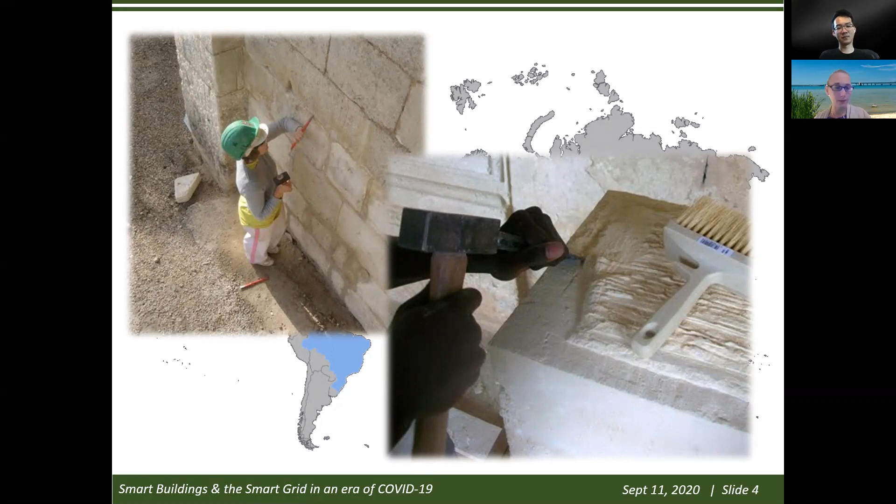But before then, during my undergrad and master's, as well as between them, I spent some time abroad. I worked in France for a little while doing historical restoration - these are pictures of repointing old buildings in Saint-Emilion. We actually got to hand carve stones to replace ones that had fallen out of infrastructure. It was really interesting to learn. This was one of my favorites that we carved, kind of unique. That was really fun.

I also worked for almost 10 years with Engineers Without Borders at the University of Maryland chapter. We did several different projects that I worked on in Brazil, including a wastewater treatment system and constructed wetlands. I really enjoyed that.

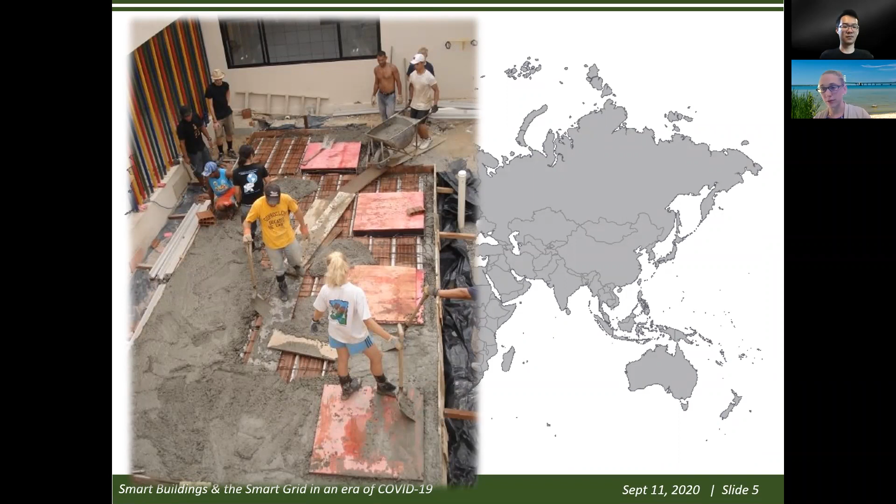Also did some solar decathlon work. These are some of the first two participations University of Maryland had in the solar decathlon competition, close to its beginning. That was enjoyable and introduced me to a lot of building concepts.

I worked for a little while in DC at Simpson Gumpertz & Heger doing what I'd call forensic engineering and building envelope consulting. They're most known for designing Epcot's ball, the big dome, if you've ever been there.

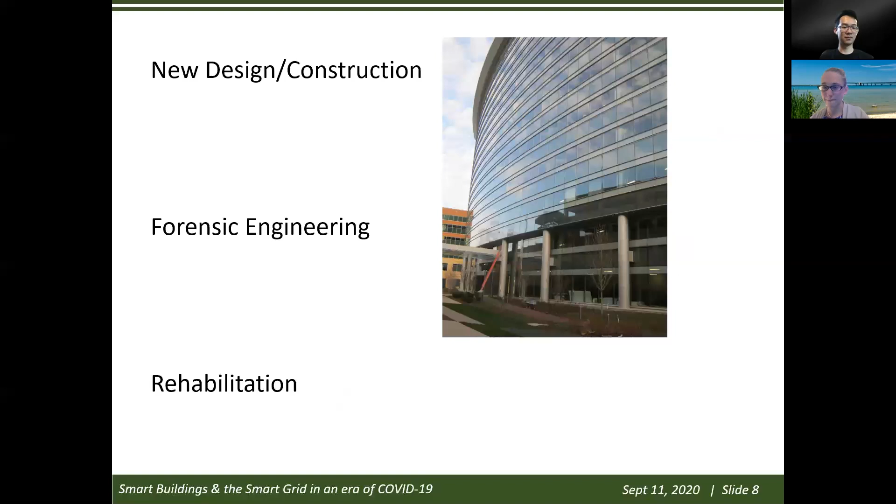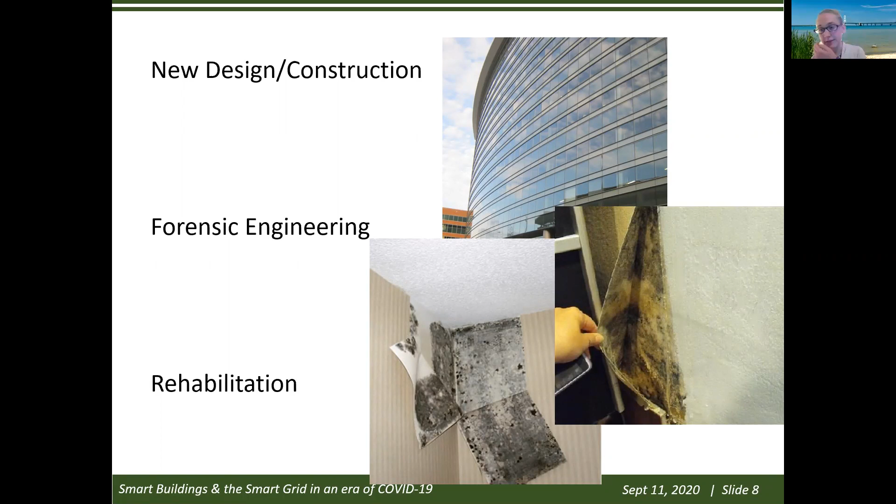We did new construction work, like going to buildings and telling contractors what they were doing wrong and how to fix it, and investigating challenges like mold-related issues behind wallpaper and impermeable surfaces. That was really interesting. Then there was rehabilitation work, which often combined structural engineering concepts with building systems concepts. I enjoyed that a lot.

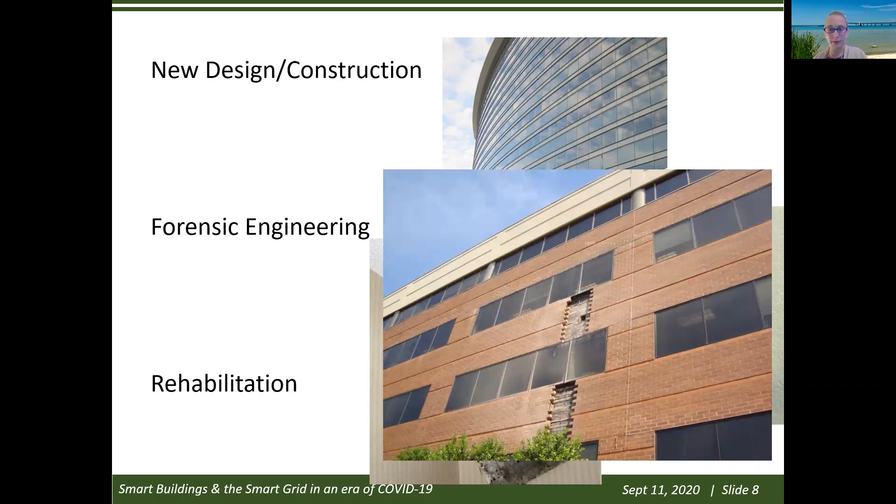For some personal reasons, I had to leave the DC area, so I ended up working and going to UT Austin in the Building Energy and Environments group, doing my PhD there for a few years. I also spent some time at NREL, the National Renewable Energy Lab in Colorado, in their residential building group, getting my foot in the door with research.

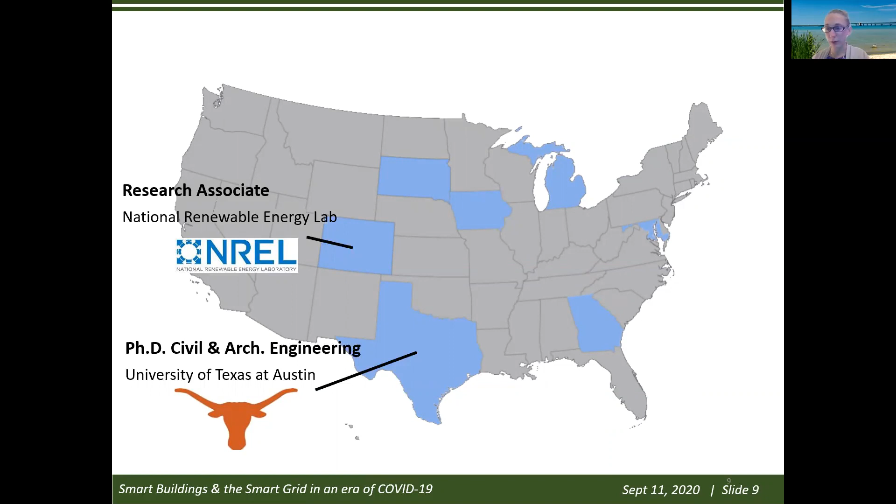Then I ended up at Iowa State University in the construction engineering program, teaching construction engineering courses and doing building-related research. Now I'm finishing my first year at Michigan State, and I'm greatly enjoying it—a bit of a different atmosphere, but that's been my journey to where I am right now.

In terms of research, I've always enjoyed this idea of sustainability, which stems a lot from these background experiences. To summarize what you'll hear about in the research projects here: it's mostly related to buildings, but not all buildings—there's a lot of civil infrastructure that requires the same skills and knowledge as building systems, just a different application. That's why I focus more generally on infrastructure systems.

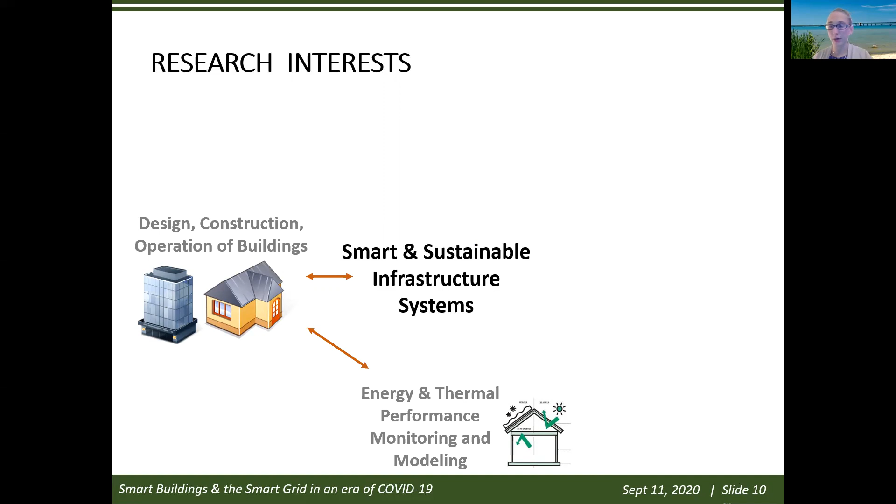So, design, construction, and operation of buildings, trying to make them more sustainable. To do that we have to understand the components of a building: energy and thermal performance—how it consumes energy, how it interacts with the environment—and how it interacts with occupants. Occupants are really important, because if they aren't comfortable, we've lost the point of having a building in the first place.

Then there's occupant behavior—what do occupants do, how do they interact with the environment, and how do we model, simulate, and understand that for a typical building? And then there's the part we can't control, the climate. This has a huge impact on HVAC systems, heating and cooling, and a big impact on comfort. It's very important for us to model and understand the interaction of buildings with climate.

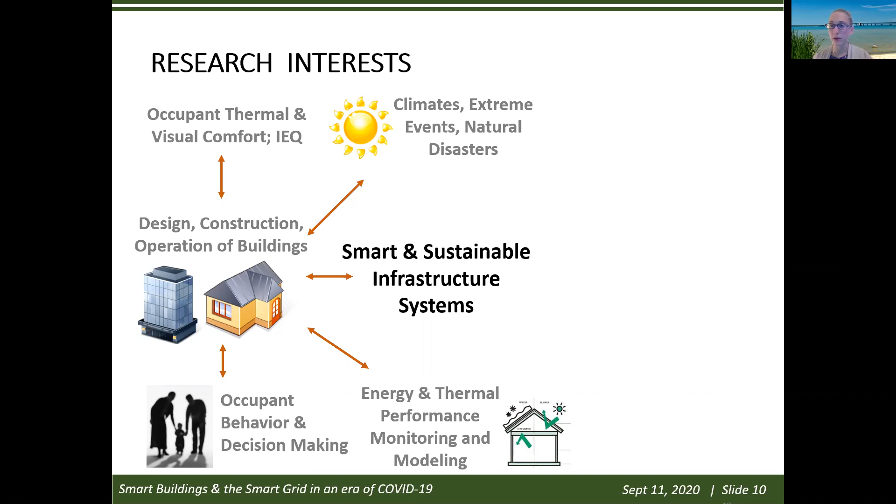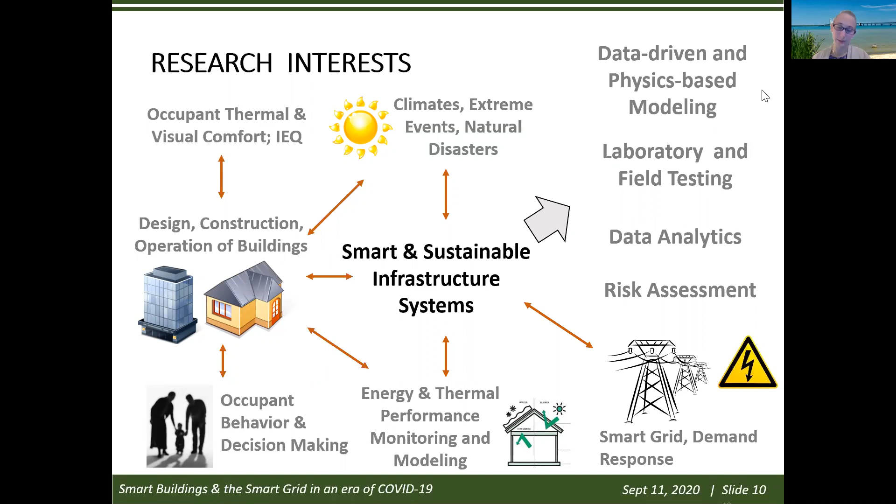All of these factors interrelate and connect to what's a more recent and important topic, according to most sponsors at least—the smart grid. As the electric grid becomes more renewable, it's important for buildings to interact with it. How do we do research in these areas? A lot of it is modeling, often combined with laboratory or field testing to validate those models, plus data analytics for data-driven modeling and some risk assessment. All of that is interrelated.

If we're going to summarize the main things we're working on, it's a combination of building science—understanding building systems and their interactions—with the idea that we have a more connected environment than we used to. Combined together, we're trying to make buildings more efficient, flexible, interactive, healthy, productive—just better in general, smarter and more beneficial to the end user. That's the overall idea.

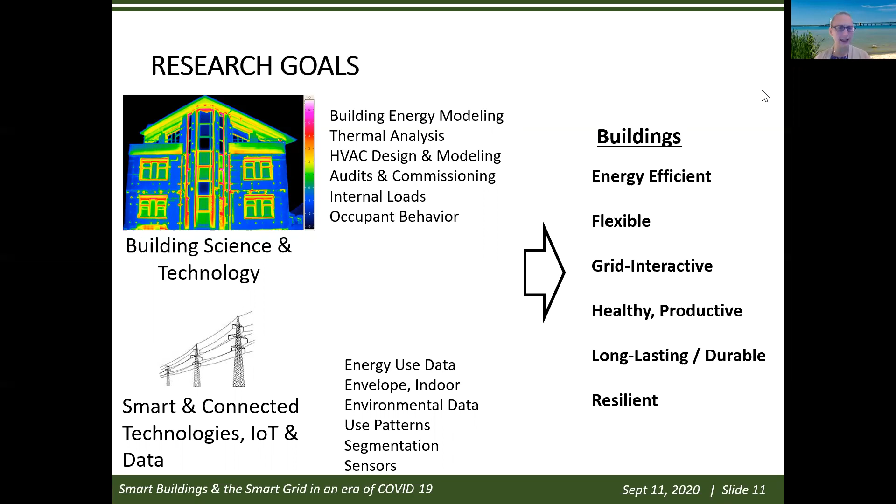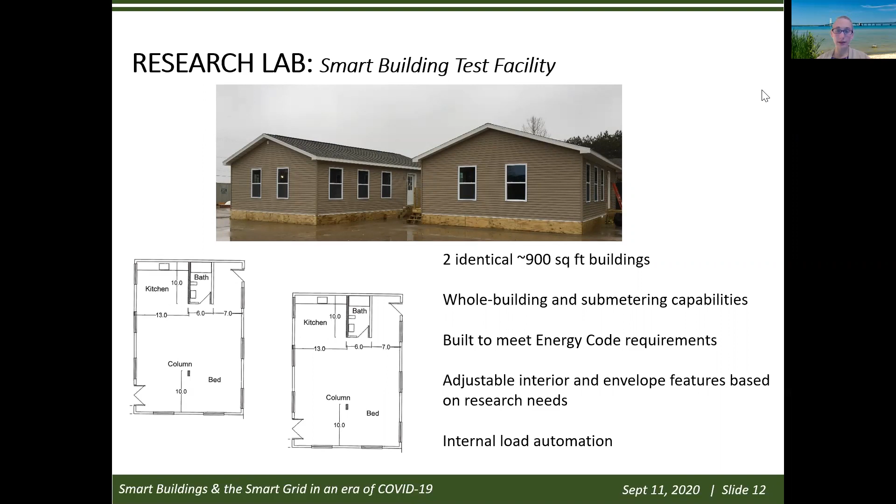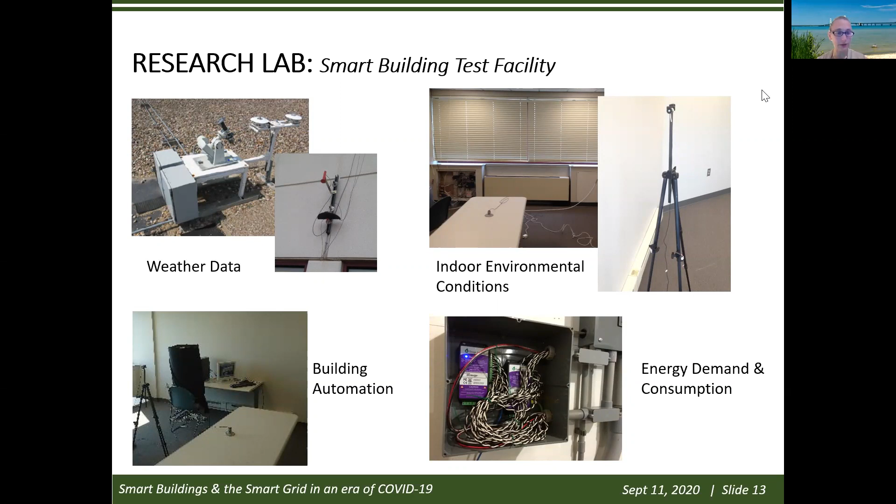So that's kind of the idea here. We automate the different systems, collect the weather data, indoor environmental conditions, energy use in these buildings to assess performance. We have a number of projects, and I'll talk about one of them here that is ongoing in those spaces. In this field, there's a lot of different applications.

But before I talk about the specific topics, I think it's important to provide some context here. I may be speaking to the choir in understanding what these challenges are, but I do think it's important to discuss, as this is ever evolving, and just like the title of this presentation suggests, things happen that are completely unexpected that impact the building field.

COVID-19 is one of those, for example, from a ventilation perspective and an energy consumption perspective. But then we also have things like climate, and climate is not something we can necessarily predict on a frequent basis, but we can look at long-term trends and try to understand what we can do to adjust our buildings.

To make them more resilient and more sustainable. So that's what I'll talk about here for a few minutes, and focus on energy related challenges, because that really is the main component of this research.

So we think about electricity consumption as we grow in population, in number of buildings, and looking at the historic trends and into the future, it's projected that we will continue to increase our electricity consumption. Similarly with energy consumption, we'll see these increasing trends.

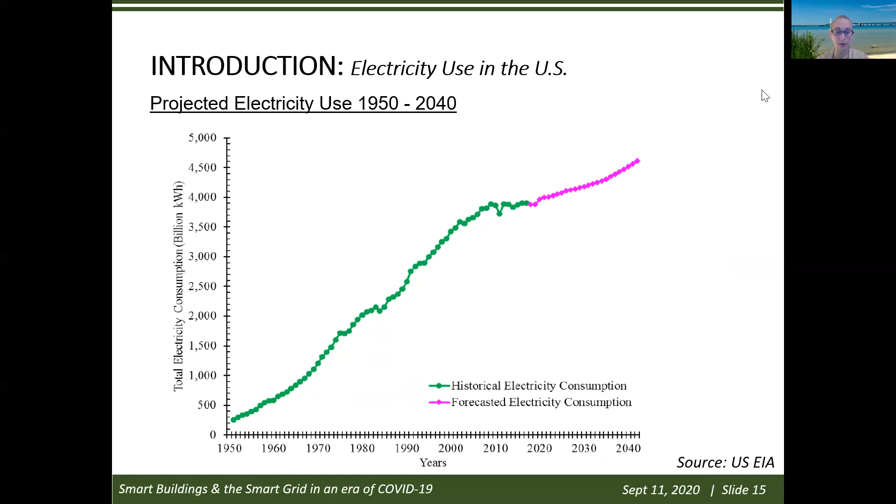And if we consider what is the best opportunity or target to be able to identify ways to reduce, or at least somewhat reduce, that energy or electricity consumption, buildings really are a significant portion—about 40% of our energy and about 74 or 75% of our electricity.

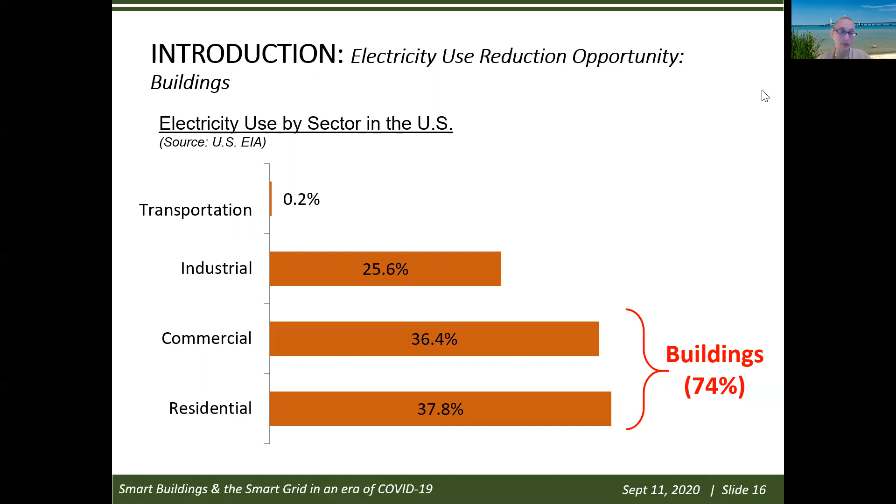And if there's not any other motivation to try to reduce this consumption, we have plenty of recent events to remind us of some of the climate change related challenges. The wildfires currently going on the West Coast, and a record number of hurricanes that have occurred recently this year before September.

That have made landfall. I came from Iowa, so recently the Iowa area had this major land hurricane with major straight line winds that devastated a lot of the infrastructure there. There's been record heat in Arizona this year and much of the Southwest, setting records that haven't previously been beaten in a while.

And we have some projects—we have a project right now working in Alaska where permafrost melt is a major issue. So you've got structural related challenges and energy related challenges in that area because of the changing climate.

So if there's no better reminder to try to think about addressing some of these energy related challenges, that's certainly some of them. Beyond electricity consumption, so kilowatt hours in general, we're also looking at demand, because buildings are a substantial consumer on the electric grid. It's important for us to consider their role in trying to make the electric grid more sustainable and more reliable.

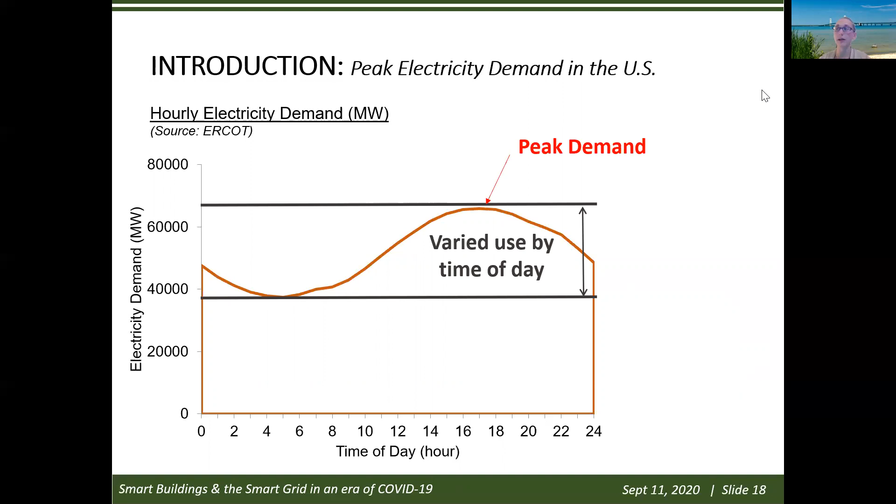So this is a plot from Texas, but it's general, kind of looks like this for all summer periods on the electric grid in the US, where we see this variation. And when it gets very hot, we get significant peak demands, and in extreme climates, for example in Texas, that significantly increases electricity prices. It can stress distribution or transmission on the grid, and also require peaker power plants, which are less efficient than ideally we would like to use.

So if we're trying to address this, buildings, at least based on some studies that have been done, are a substantial portion of this peak demand. So if we go back here, this late afternoon around 5 p.m., we've got a combination of commercial buildings being used while people are still at work, combined with residential buildings as people return home and turn on their air conditioners.

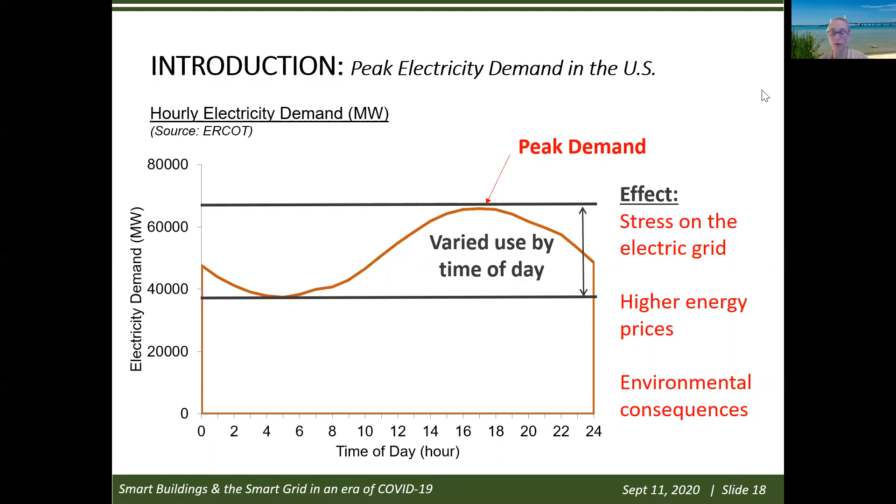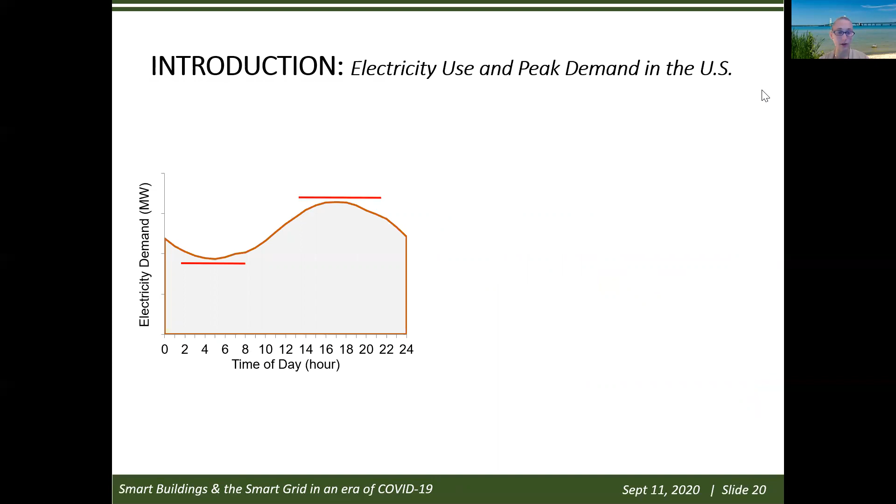So it's not surprising that buildings would be a substantial portion of this peak load. So what do we do about it? There are some different options, and it's a popular topic in DOE right now. We can either reduce our electricity consumption, improve our efficiency, reduce our peak load, which has been a focus in recent years, or we can try to be more interactive and match our renewable resources more closely by adjusting not just how much is available to consume, but when our buildings are consuming energy.

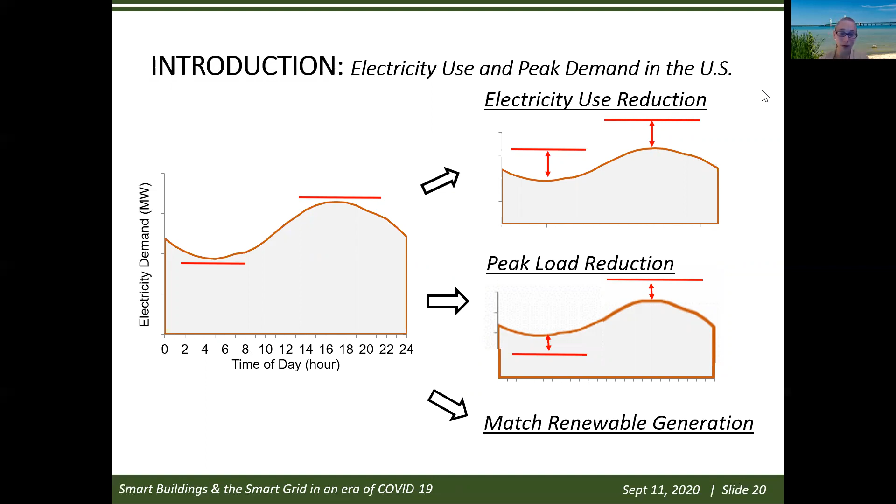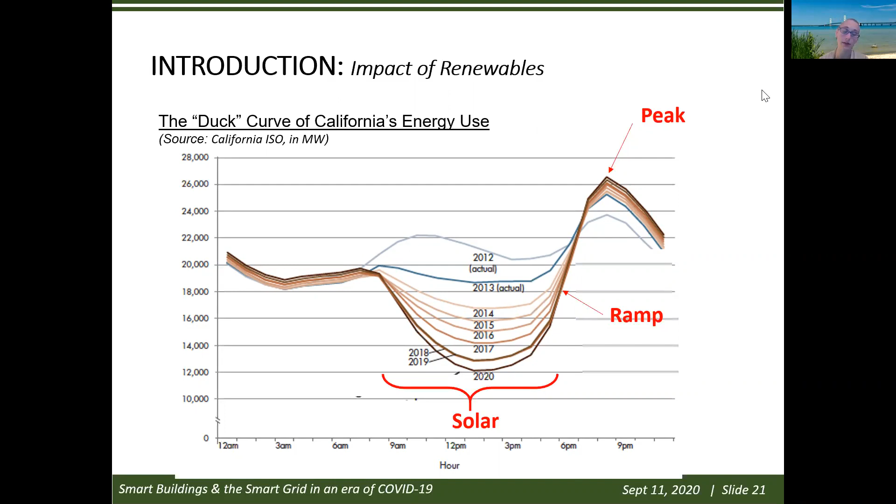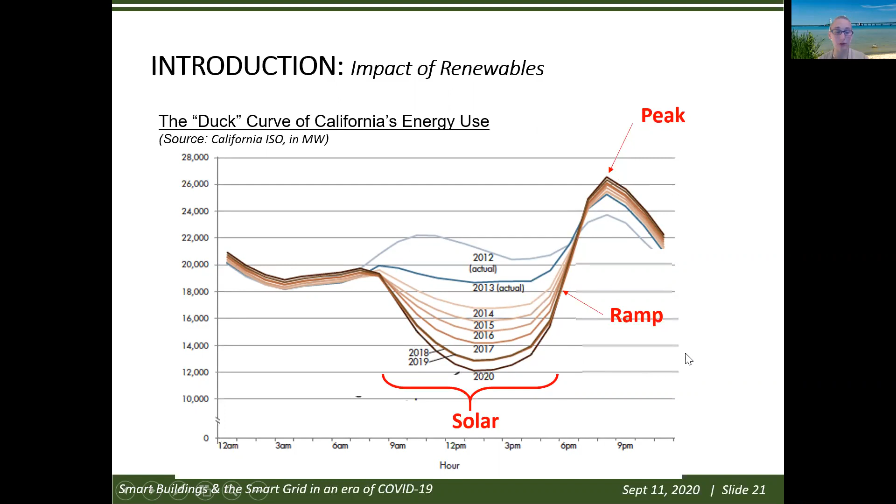So this is what's happening in California, and likely will happen across the country moving forward as we get more solar energy, more renewable energy on our grid. We get this, we call it the duck curve, because it kind of looks like a duck, where we get this reduction in the middle of the day, and then the big challenge is this ramp—a significant change in electricity demand over a short period of time. That's challenging if you're trying to provide electricity to meet that significant change for the electric grid. And then you get a peak that's higher than what the original peak would be because you've got more consumption during that period. These challenges, particularly the ramp, are something we have to keep in mind as we try to make a more renewable and sustainable electric grid and buildings.

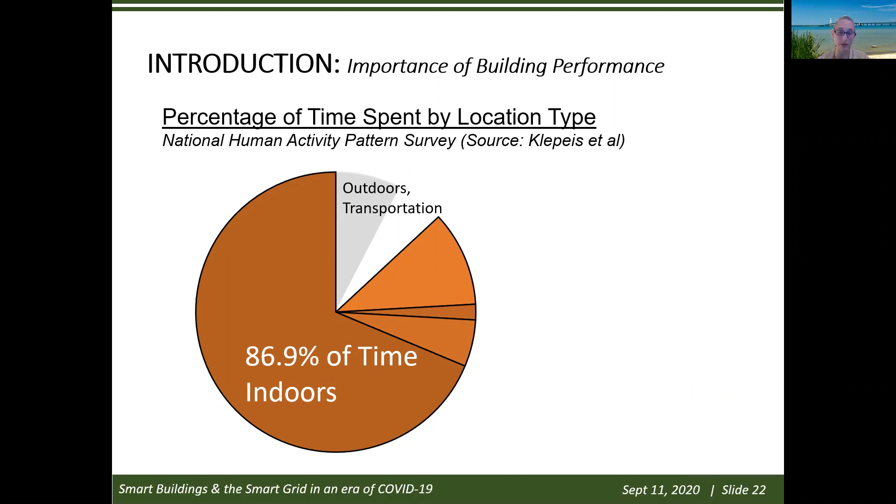And we have to do this all while considering that buildings are built to provide an environment that's comfortable for occupants, for the people that live in them and work in them. As we spend about 90% of our time in buildings, and at least by historical trends about 70% of that being from residential, we have to make sure that if we're improving the sustainability of our buildings, we're also considering thermal comfort, visual comfort, indoor air quality, and indoor environmental quality—particularly important in times when we've had natural disasters.

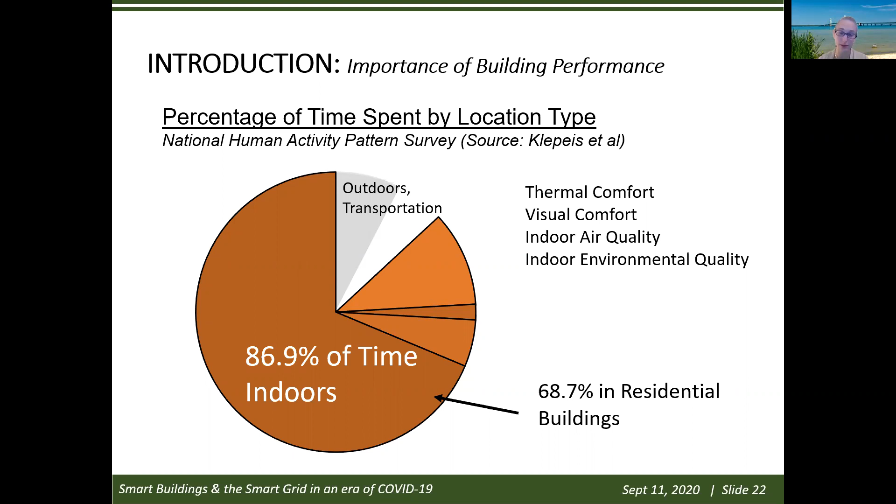So what are the opportunities? What do we do about this, and what does this research relate to? We have seen substantial growth in connected devices, Internet of Things, and sensors over recent years, and I'll show a graph in a minute about that. At the same time, starting a lot of it during some of the economic recession money that was given out to support economic growth, we saw a lot of growth in smart grid infrastructure, smart metering, those types of things. So we have more connectivity on the electric grid than we used to—communication between our generation, our consumers, and our transmission that enables us to collect more data, and also enables us to have more dynamic interactions between these players that we didn't used to have.

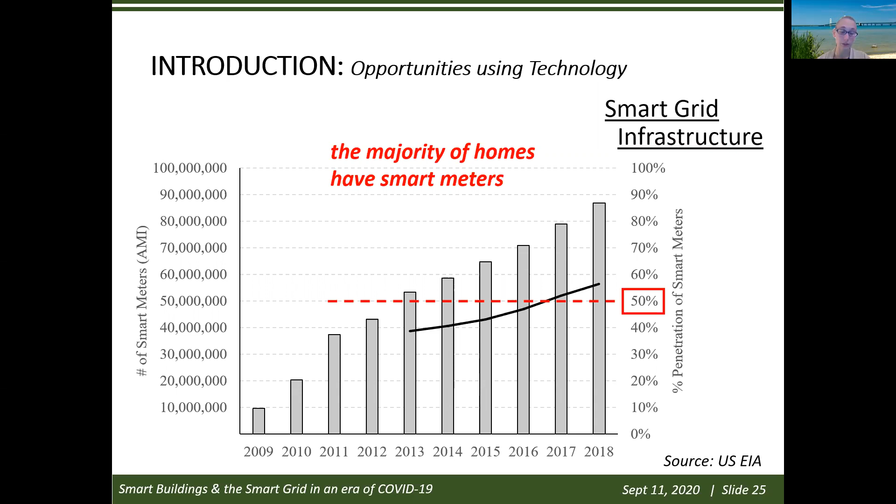So what do we do with research on this? This picture shows some of the areas that I work in. I'm going to touch on some of those projects, and then talk about COVID-19 related implications for some of those assumptions and efforts we're working on. You see a few different topic areas here: occupants, building envelope systems, smart appliances, HVAC systems, and grid interaction. I'm going to touch on a project for each of these, and some of the efforts we're working on. If you're interested in more details, I'm happy to provide them. Just wanted to give an overview of some of the things I think are exciting and interesting in this area at the moment. So these are some of the projects I'm working on, and I'm just going to touch on a few things for each of them.

So this one is the first one. We've had a few projects, and we're now working on a third that I didn't have time to add here, but it's a DOE project.

Some efforts to try to improve the adaptability of building systems and the building envelope specifically, so the barrier between the internal and external portions of a building. Right now, building envelopes, our walls and our windows, are very static. They don't change. Their properties are always the same.

We've generally accepted that that's the case. But the idea here is that the properties of those building envelope systems could be changed and adjusted to make them more ideal for the conditions occurring at a particular period of time. Can we build in elements into these systems that can be adjusted dynamically based on the conditions that they sense, to make it more energy efficient and make the occupants comfortable at the same time?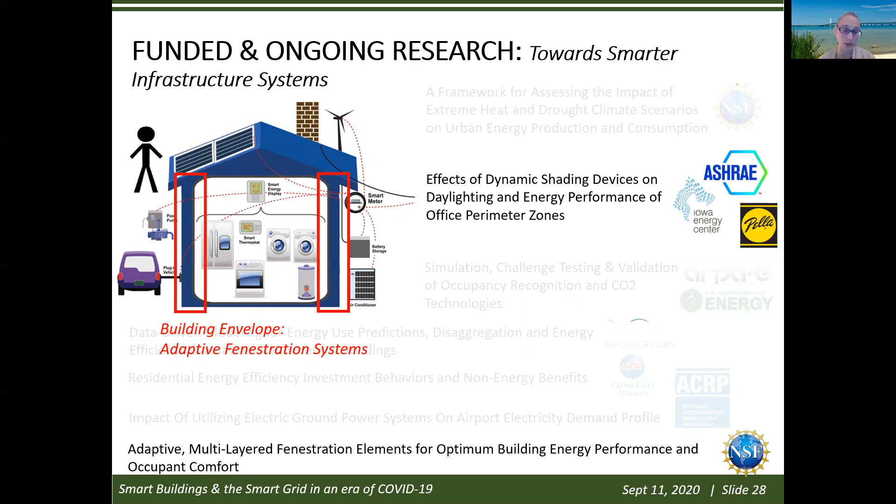So just to show a diagram here of what we're currently working on. If you picture a typical building and a window, often there's shading devices on the interior. People want to adjust if there's sun coming in or not, but they're typically manually controlled.

Studies have shown that blinds or shading devices in general are never adjusted to their ideal conditions on a regular basis if they're manually controlled. But at the same time, blinds alone on the interior are not as energy efficient as trying to adjust penetration of solar energy into the building from the exterior.

So what we're doing here is we have a multi-layer system of fenestration where we retrofit it onto an existing window and add electrochromic glazing on the exterior so that it's adjusted based on the external environment and occupant preferences. And then on the interior, we have a shading device.

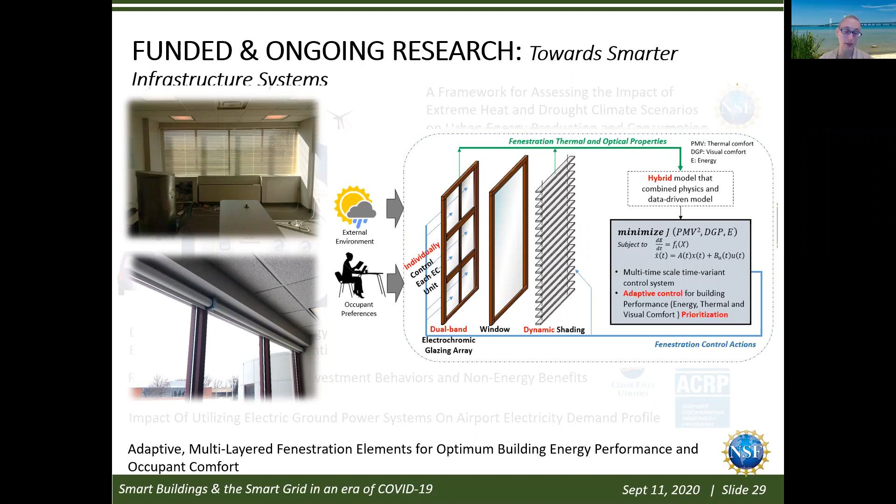Those two in combination are adjusted to try to optimize occupant visual comfort and thermal comfort, and reduce energy consumption. So that's something that we're currently working on. We've done a lot of modeling related to that and are now doing some laboratory testing, working on setting that up. So that's one example.

Another one that we're working on right now considers future scenarios of buildings and their impact on different types of demand response, reducing energy demand when the grid requires it based on a signal of some sort. So the impact of demand response resources on transmission and distribution investments.

The idea here is, if we have significantly higher renewable energy penetration and much more electrification of the grid, that means we can't necessarily predict when wind is going to be available, and we can kind of predict it for solar, but there's also some variability there. So we need loads that are much more flexible and able to adjust themselves when needed to meet those demands.

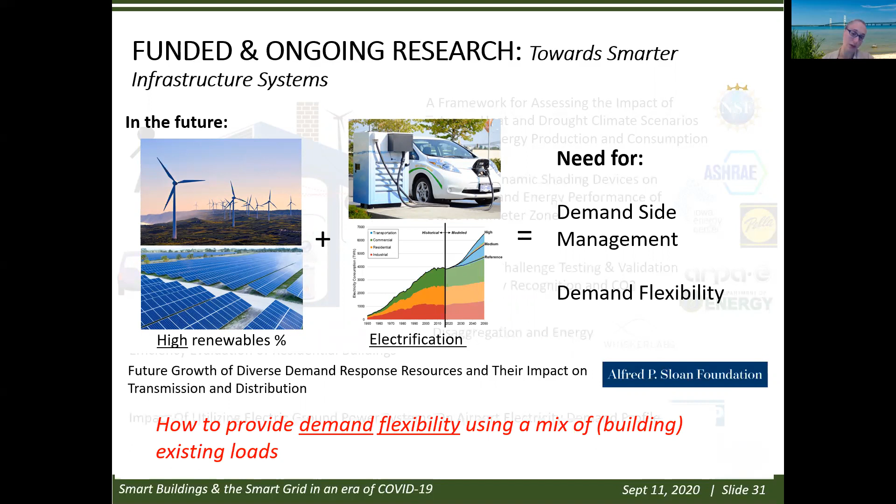But then you look at, say, an electric dryer, which has a substantially higher amount of demand when it's on, but the amount of variability in when those dryers are used is much higher.

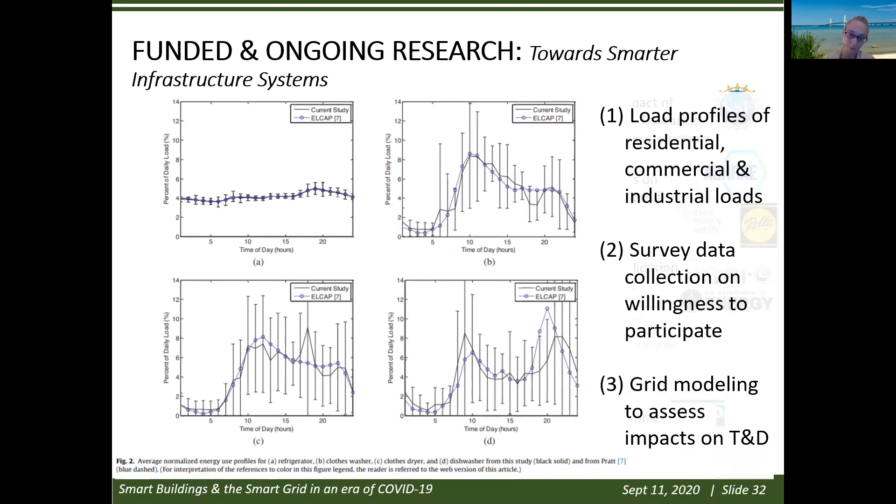What we're trying to work on is figuring out how we can combine these types of available resources together to provide our future grid the resources it needs to be adjusted for different grid services, to make it reliable, but also supporting different types of renewable resources. So that's what we're working on with this project.

This one is interesting. We just finished it up, and I think it speaks to some of the future of electrification in general. This is an airport, so we got the chance to work with the Des Moines International Airport to monitor energy consumption of what they have recently implemented as electrification.

Instead of using gas-powered systems to support their airplanes when they're docked at their gates, airports instead use electric ground power systems and electric air conditioners, or preconditioned air systems. As a result of this electrification, we were wondering how much it's impacting electricity costs.

As we move more towards an electric grid that varies in demand and available electricity use, and with different types of electricity cost structures, what are the implications for airports? We looked at and monitored gate use and the electricity use of these systems over about six months or so, trying to understand what the implications are.

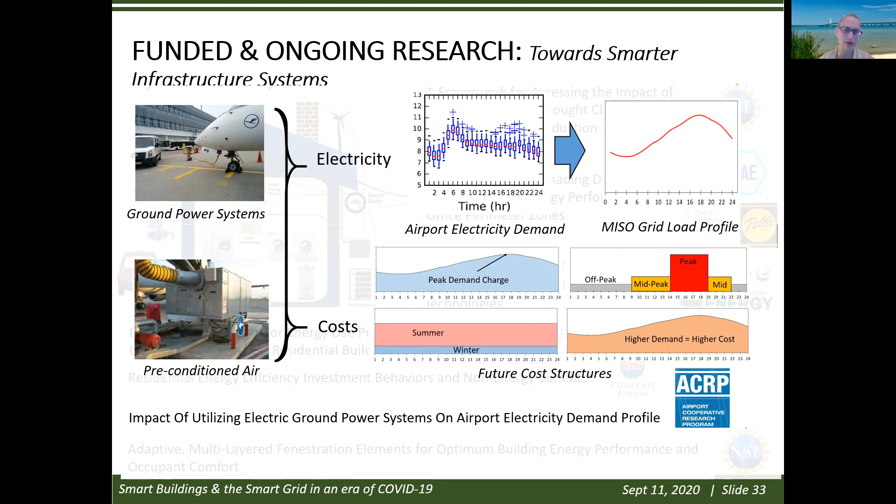So we collected this gate use data and monitored energy consumption. If we think about peak demands right now, gate electrification represents a very substantial portion of electric loads at airports in general. So if in the future we have cost structures more focused on peak demands, that's important for them to consider — and that goes for buildings in general too, since knowing when peak demands occur is important.

Okay, next I want to talk about something more high level, associated with trying to model what the energy demands are overall, like in a city. There are a number of challenges here that are somewhat interesting.

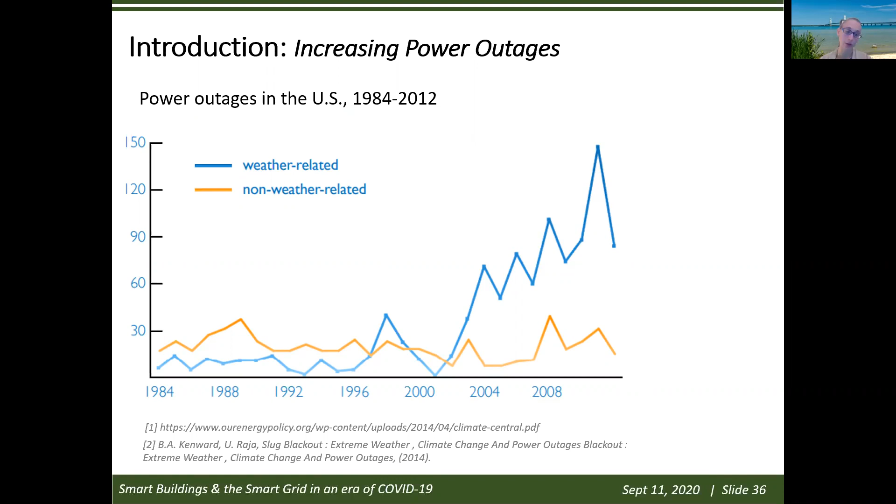This is motivated by power outages and understanding what the energy consumption is of an area as opposed to a particular building. It's important to consider, since we lose so much from power outages due to reliability or weather-related issues. If we can better predict the energy demands of a city, that helps us understand what the challenges might be moving forward.

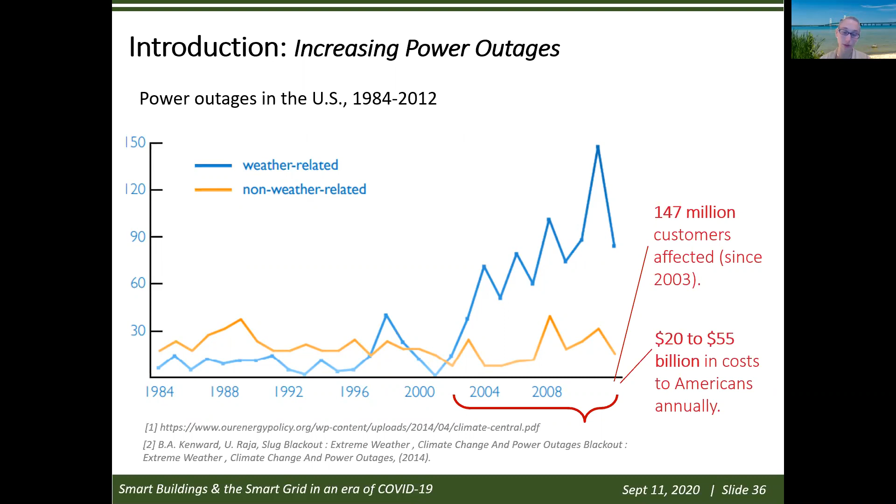So what we worked on in this project was trying to assess, in the future, what these extreme conditions are going to be — what the peak temperatures will be in the locations we looked at. We looked at Texas and Iowa to predict what these extreme weather conditions would be, extreme heat in particular, since that's the main driver for energy demands on the grid.

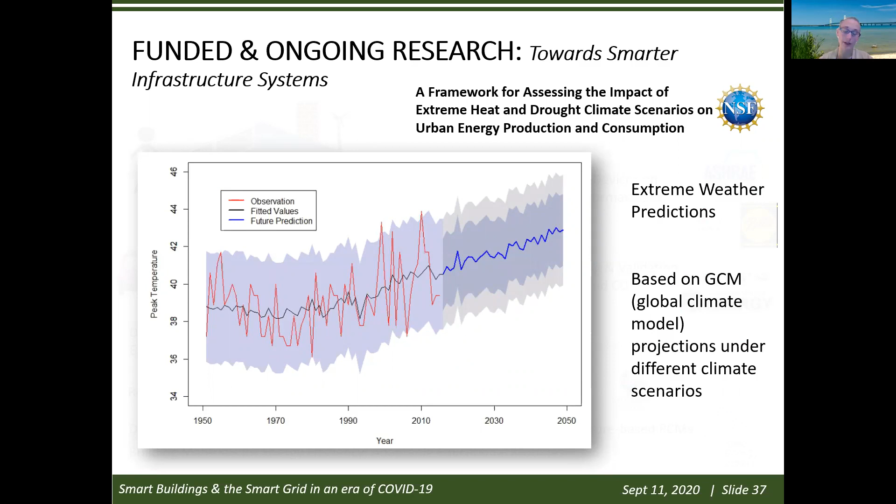We worked with climate scientists to develop global climate models representing spatial and temporal variation in weather conditions. This is called a WRF model — a forecasting model with several different domains that also considers an urban canopy model, a representation of the buildings in a city, their production of heat, and their interaction with various components of the weather.

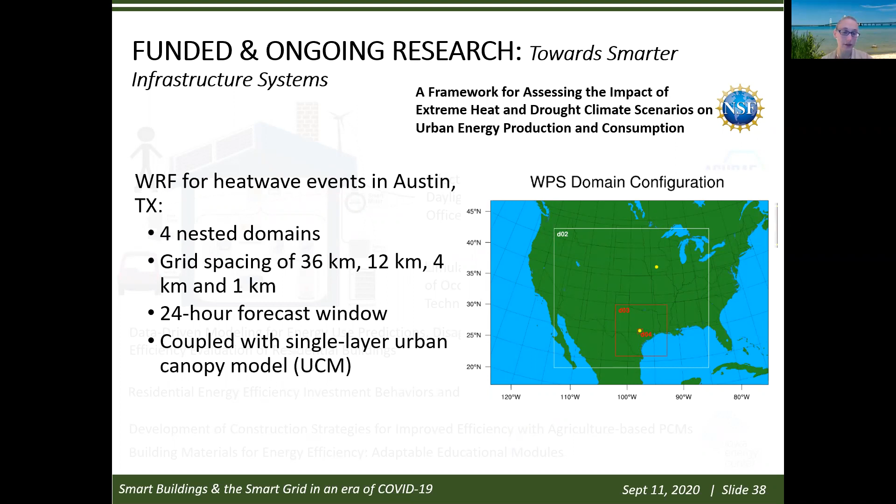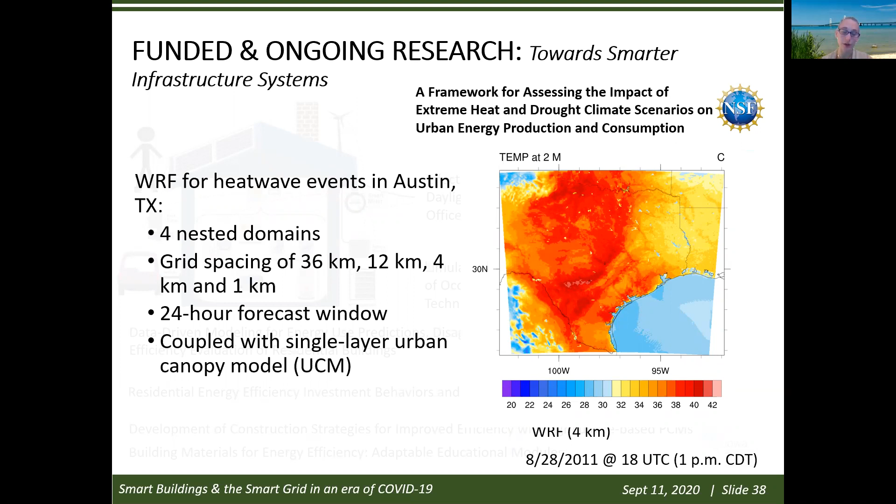So we created this coupled WRF-UCM model to try to understand at the city level how some of these extreme events might occur. This shows what that type of simulation looks like and the spatial variation over a location. On the left is the model without considering the city — those stars are locations within the city of Austin. When we consider buildings and their interactions, we get a better representation of the spatial variation in temperatures.

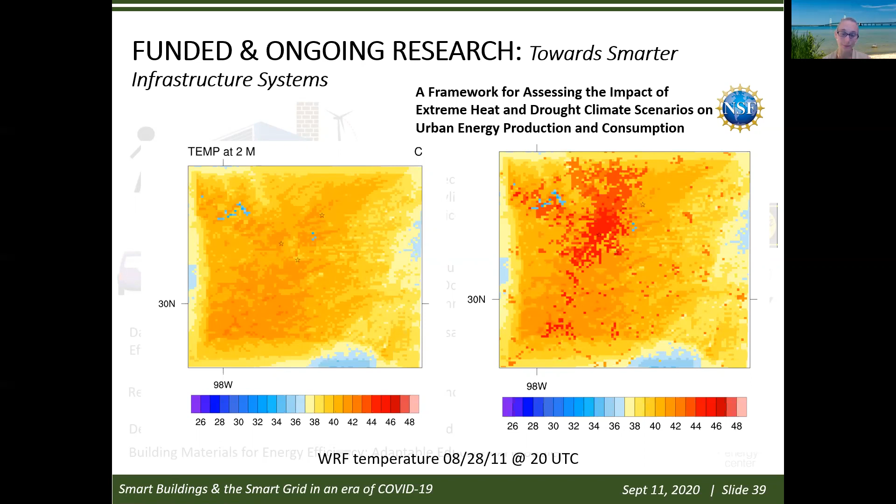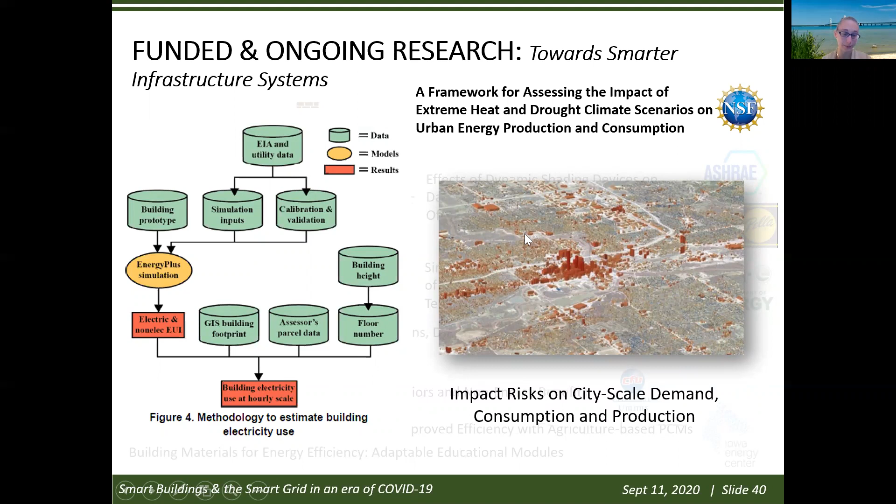We then used that to create a model of city-scale energy demands and consumption, visualized in GIS to show where the extreme consumption and demand are located within the city. What we get is a model, validated, that tells us what the energy demands of the city are, and we can project that into the future based on environmental conditions and how they vary spatially. So that's some high-level efforts, not building specific, to try to model energy.

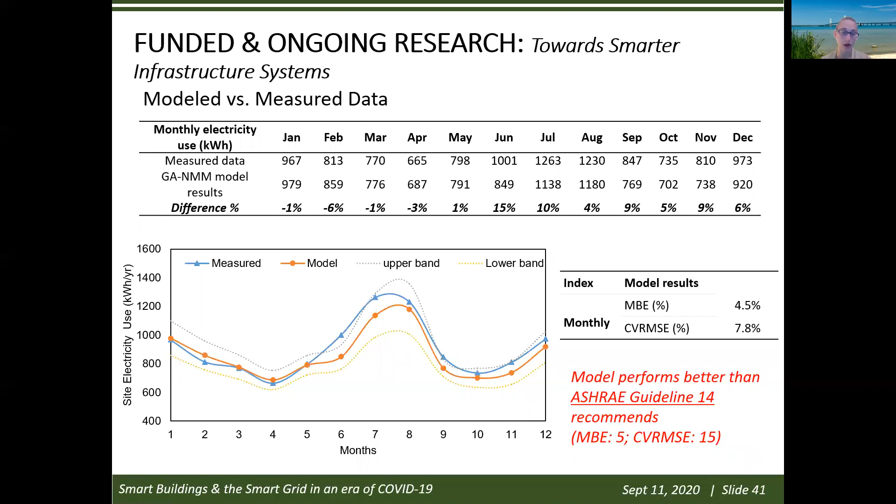The last thing I'll talk about, before discussing the implications from COVID — which I think is very unique and interesting since it's not something any of us would have anticipated — is that COVID-19 has impacted this project, which focuses on occupancy, because we're supposed to be testing occupancy sensors, yet everybody's not where they normally are, nor are they following their typical routines.

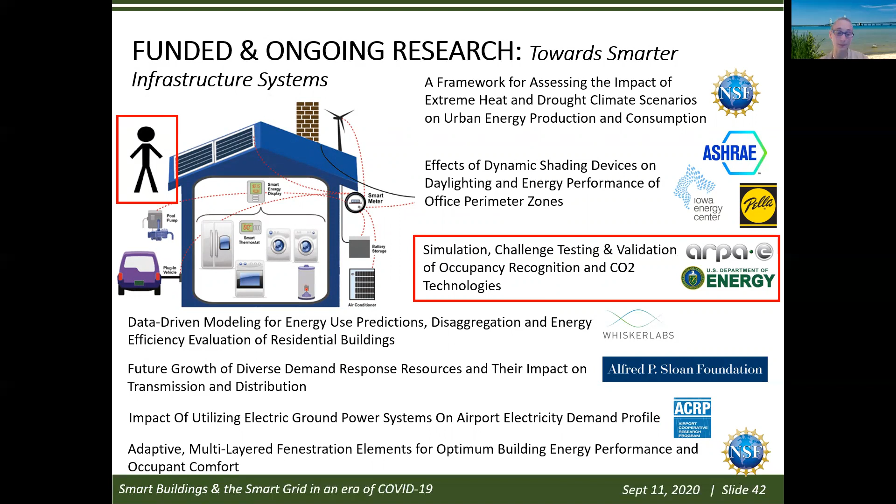So what do we do about that? What's going to happen? What do we assume? These are all very interesting things to think about. But occupancy in particular is something that it's hard to say, as we move through these COVID-19 related challenges, what's going to happen. Are we going to go back to our normal routines, or are we going to change them? Anyway, this project focuses on occupancy sensors.

So what we're working on is trying to figure out a standard methodology for testing occupancy sensor systems in residential and commercial buildings. We want to understand the reliability of these systems so we can compare them, and what's their potential energy savings.

You might say, well, occupancy sensor systems already exist. The idea here is that we're trying to test occupancy sensor systems that would be lower cost and more reliable than what we would normally consider.

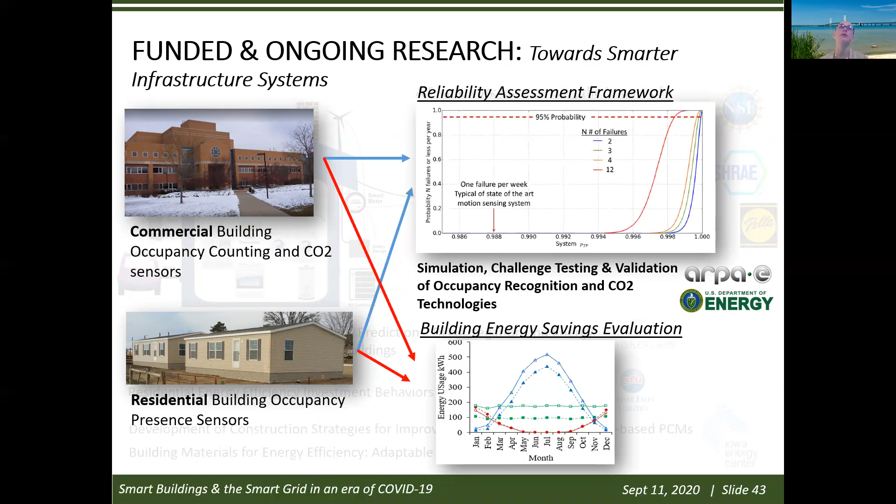And unlike most occupancy sensor systems right now, which are connected to lighting systems, that's the main use of occupancy sensor systems, these would be connected to the HVAC system. So the heating and cooling system would be adjusted based on whether there are occupants there or not. And that represents a substantially larger amount of energy savings compared to lighting.

So the interesting thing here to think about is occupancy. Right now in modeling efforts, occupancy is generally considered to be consistent over time. In energy modeling programs, standard considerations are that we, as occupants, are generally following a similar schedule regardless of our socioeconomic status, our family size, same kind of thing. And we thought that was somewhat arbitrary, and we wanted to look into it more.

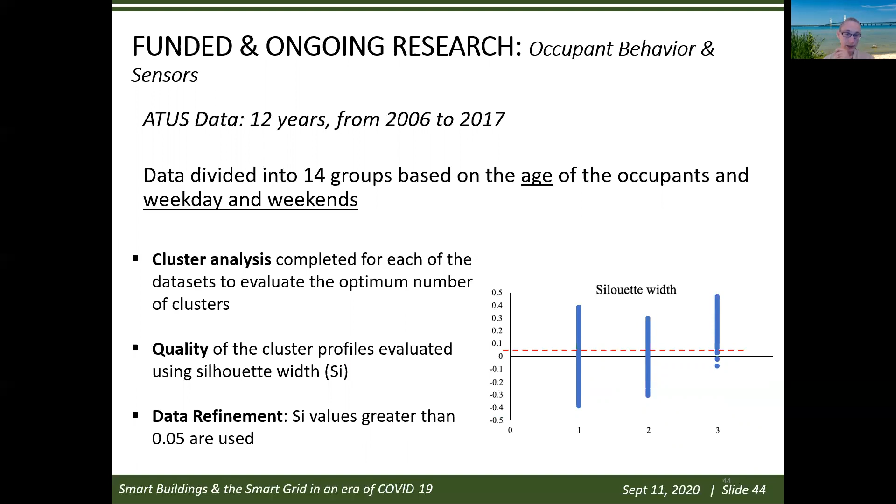So we've worked with this national data set called the ATUS data set to try to understand better how occupancy varies, and it's been very interesting to look at. We did some cluster analysis to look at differences in occupancy profiles, generally across age groups. There's of course some variation, and there's also variation by income level, among other things. But in general we see kind of a stay-at-home pattern, a work in the day pattern, a work at night pattern, and then some that vary in between those things.

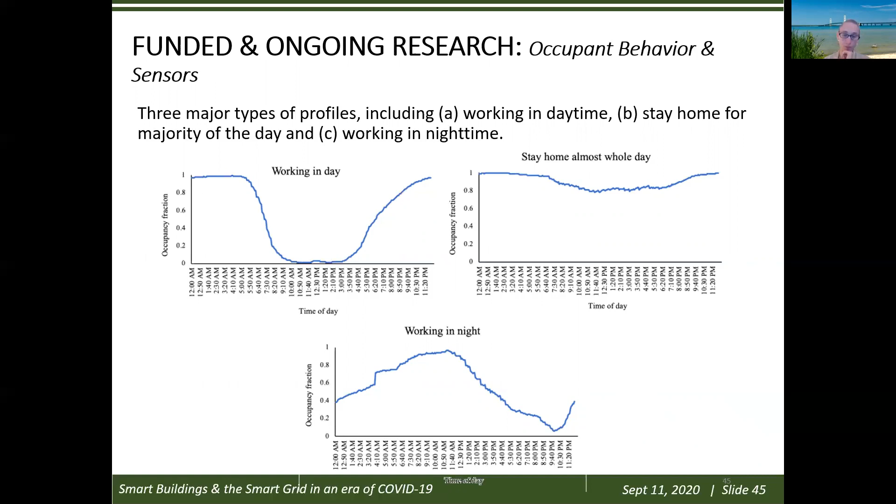And so, why do we care? We care because if people are at home more versus not, that substantially impacts how much energy savings can be achieved. People that are at home all the time can't really get much energy savings if they're there, but people that are gone, you can get much more. So the question is, which type of household are we looking at, and is that important?

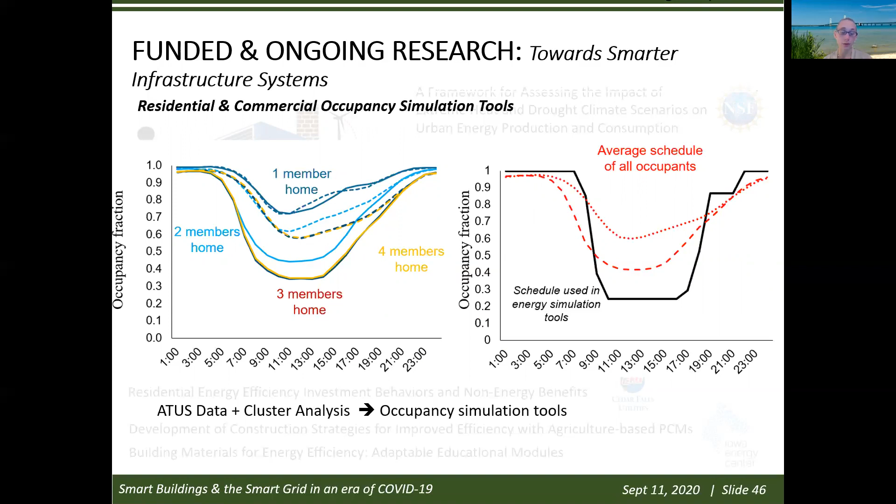What we've worked on currently is developing this occupancy simulation tool to allow other people to be able to use it. This is just the procedure, but it's interesting to think about and to see.

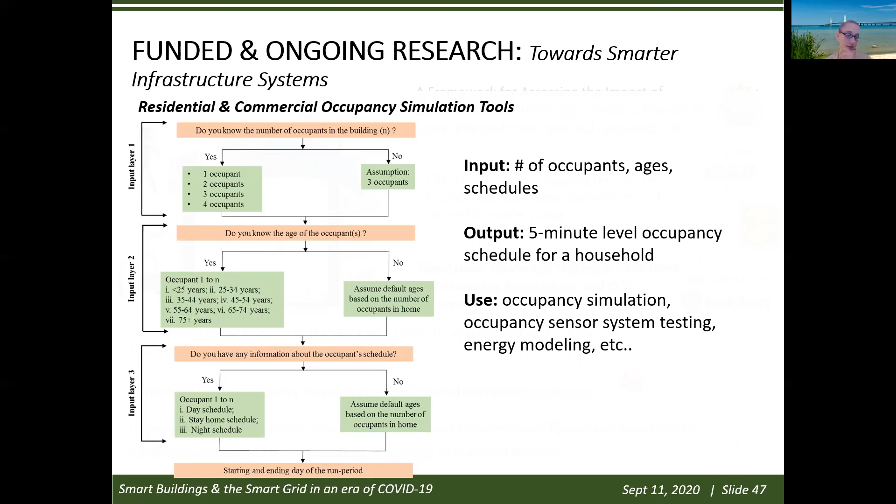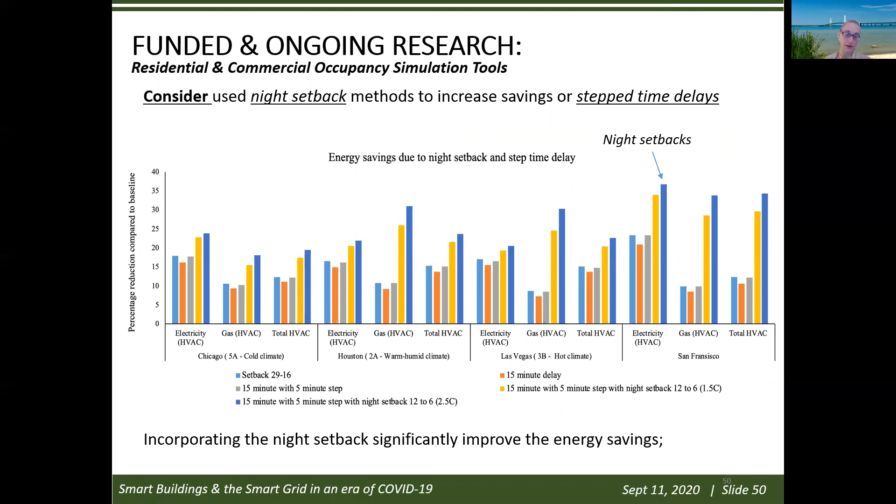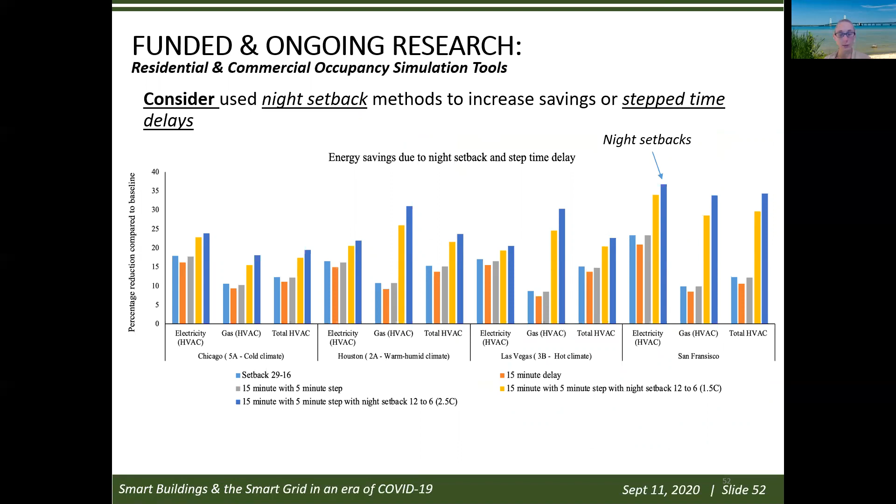But the question is, as we go forward with this testing and continue, these assumptions for occupancy are based on historic data. And the question is, well, COVID-19 happened, and we no longer are following anything close to what pre-COVID-19 related assumptions look like. The question is, are we going to return to those previous standards of living, the previous things that we've done—commuting to work, being home for X amount of time?

Because it's fairly consistent across the years if we look at our analysis, but whether or not that will actually continue now that we've had this substantial change in lifestyle is a big question. And the other question would be, what are the implications of this? Is it a positive or a negative implication? So that's what I want to talk about here for the next few minutes, and then we'll go to questions.

So as a result of COVID-19, what things have happened? These are generalizations, but generally correct. Residential buildings: people are spending more time at home, whether required to work from home or not. More children are at home, whether for personal reasons or otherwise. People are homeschooling, or schools and daycares are closed. More people are working at home too, by choice or not, and others have lost jobs and are home as well. So the amount of time people spend at home, and what they're doing there, is substantially different. Commercial buildings: people are going to restaurants less, using sports complexes less, if at all.

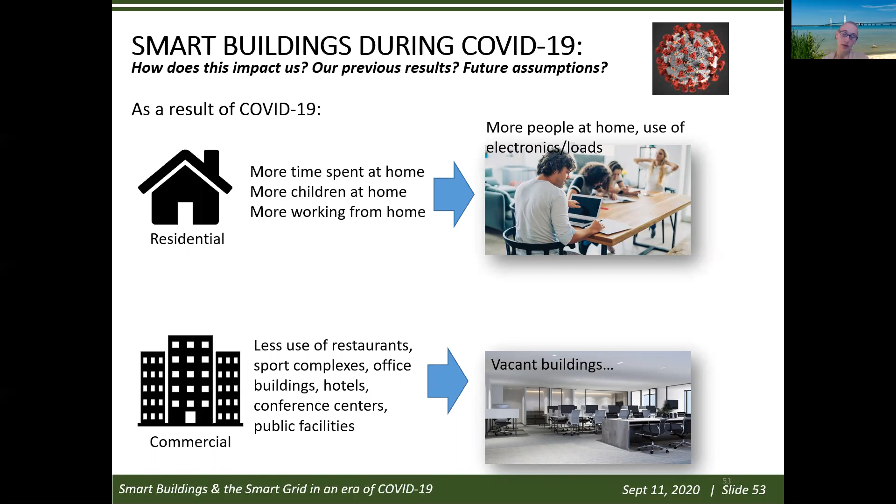Some office buildings don't have any people in them. Hotels, conference centers, public facilities - many are either closed or at minimum capacity. So from a residential standpoint, we've got more people at home, and we're likely consuming more electricity. From the commercial standpoint, we've got a lot of buildings not being used the way they were designed. This has implications for the electric grid.

So the electric grid in general across different countries saw reduced energy consumption, at least for a while, because of this change in how buildings are used and people being at home. The question is, will our patterns of electricity use continue that way, or will they change or turn back to normal? What's going to happen? That's hard to say, as we haven't gotten to the end of this yet.

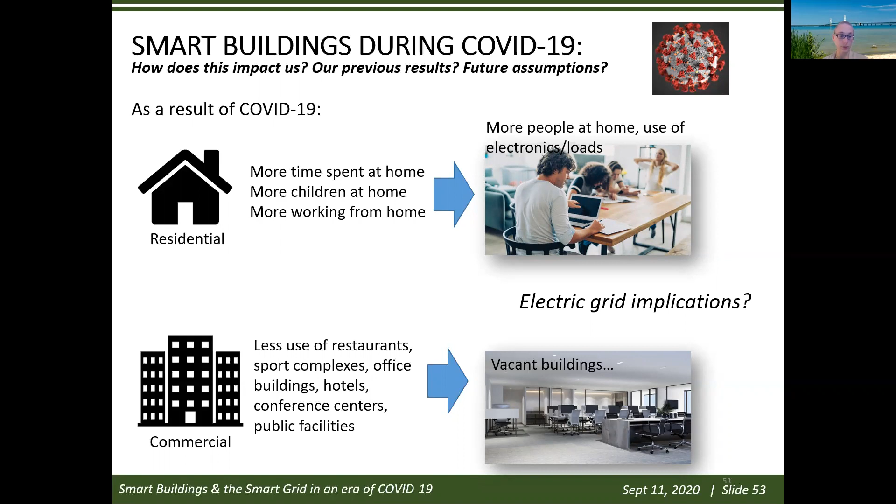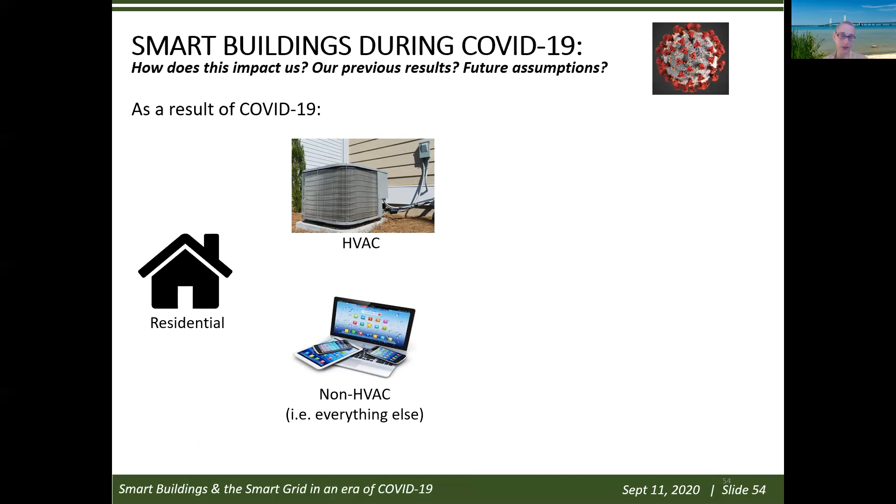But let's talk about residential for a minute. This is something we decided to spend time on to try to quantify. We thought about it in two different ways: one is HVAC related and one is non-HVAC related. HVAC being your heating and cooling system, and non-HVAC being everything else - all of our electronics, our appliances.

We thought about whether we've changed how we're using our HVAC system. Are we using it more? Are we keeping our house more comfortable because we're at home more? From the electronics standpoint, are we using more electronics? Are we using our appliances differently? What are we doing differently? You'll probably say, well Dr. Cetin, of course we are - we're changing it because we're at home more. But our question was how much, and has that changed?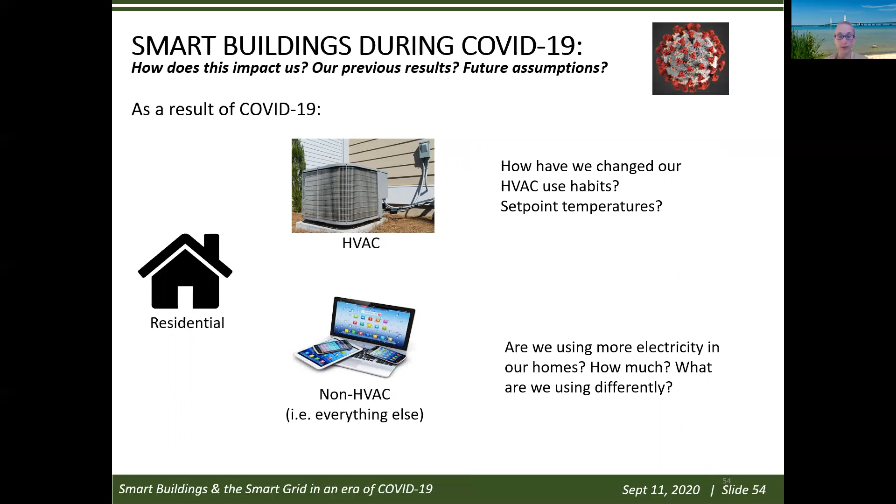So we did some preliminary analysis, working with a data set in Texas we've worked with previously that monitors single family home energy consumption. It was really interesting - we compared multiple different years. This is just one example, comparing the same homes from 2018 to 2020, about fifty homes.

You see here in red, 2020 compared to 2018, across every day of the week and month of the several months following COVID-19 - we're working on the others - but you see that substantial difference in the non-HVAC use. So 15% or more per day. For these somewhat larger homes, that's about 2 kilowatt hours more per day per home. That's important when we're thinking about assumptions for occupant behavior for energy savings.

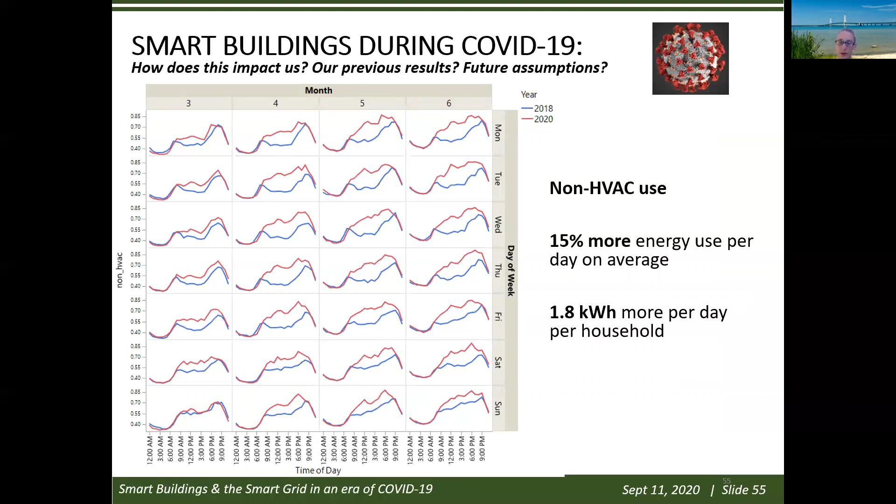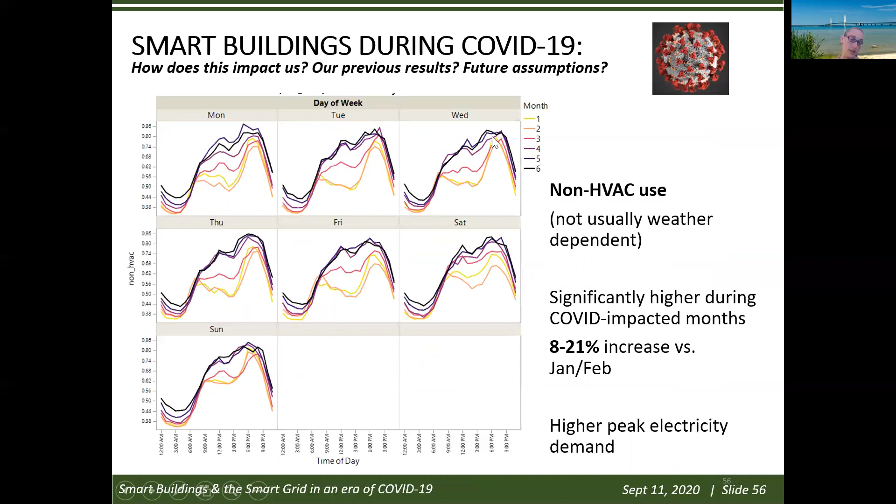Same thing here when we're looking at non-HVAC - significantly higher if we look at January and February, the yellow and orange, compared to March, which was partially impacted by COVID, to April, May, and June, where they're all centered around this higher profile. That's an 8 to 21% increase in non-HVAC use during these periods. Peak energy demand is also slightly higher. This is important and different than what we've seen really ever in our lifetime, at least.

Then we think about it from income level, and this is also different. We see on the left here, based on our preliminary analysis, the lower income levels - not low income, but lower income - don't have as much difference in their energy consumption patterns compared to, say, the upper brackets of income level by household. That's interesting to think about too, in terms of occupant behavior related implications.

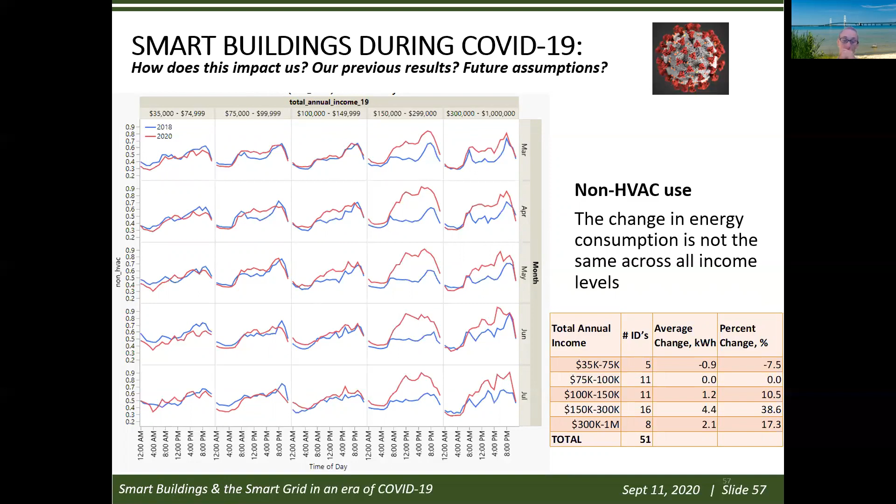How are people changing their behavior? It seems like it does have some impact, and your income level does seem to vary somewhat, at least across the data set we looked at.

Then in terms of HVAC use, it really does depend on weather. So if we look at the x-axis, this is temperature, and we're normalizing by temperature. These look a little messy, but the point is, if you look at 2018 versus 2020, the line is translated up slightly in all of these cases. The idea is that per weather condition, per day, we are consuming more energy per typical temperature conditions. So we are consuming more of both.

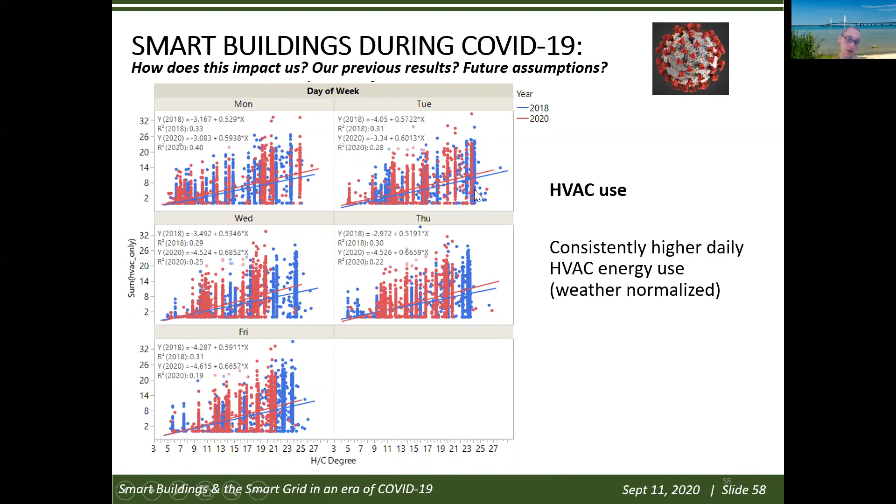So what are the implications of this? This is the end here. Things to think about for this field in general in smart buildings: what will happen with work post-COVID-19? Are we going to have commercial buildings populated in the same way or not? Are our historical assumptions about occupancy valid? Do we need to change what we model? Do we need to change how we assume things? But I think the more exciting thing, something that's been really interesting to talk with collaborators about, is whether this means there are opportunities for improving the sustainability of our infrastructure. I'll give one example, then stop for questions.

There's been a lot of discussion that since buildings aren't occupied, you'd expect commercial buildings in particular should be reducing their energy consumption substantially. And while there is some, it seems there's significant opportunity for more. So if we could better sense occupancy in our buildings, we could better reduce that to make buildings more sustainable when things like COVID-19 might happen again in the future.

So that's the presentation. Tried to keep it on time here, so I think we have a few more minutes for questions. I'll let you lead the way on how you want to do this.

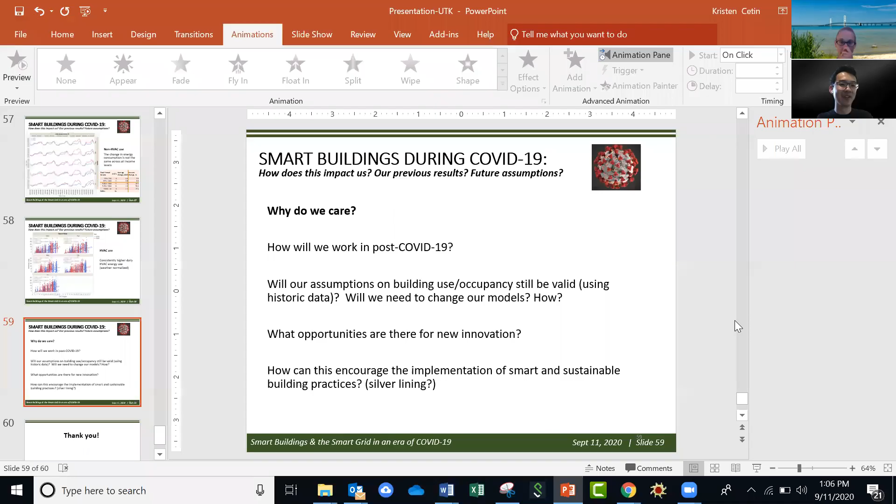Oh yes, I think Professor Cetin has done everything you can think about, including my field. So very impressive, very impressive. I have a lot of questions, but I'll keep it short.

One is demand response. We have been talking about demand response for so many years, and still some areas or cities don't even have a demand response program. For example, Knoxville, Tennessee. How are you studying demand response in terms of how it's different from other incentive programs? What do you think about this incentive, this demand response program? It's an important component, but not many cities are adopting it, or not many people know about it, and there's a lot of barriers. So what do you think about demand response for the future?

So I guess I probably have an opinion. I also read some industry reports that survey the industry about demand response. Right now, most demand response is associated with commercial and industrial loads. But most of the reports I read, and survey results from industry and utilities, say that moving forward, more demand response will be associated with residential buildings, because there's such an opportunity there. In terms of how that's done, my understanding is that most of that on the residential side right now is related to HVAC systems, so direct load control, and then more recently, smart thermostats.